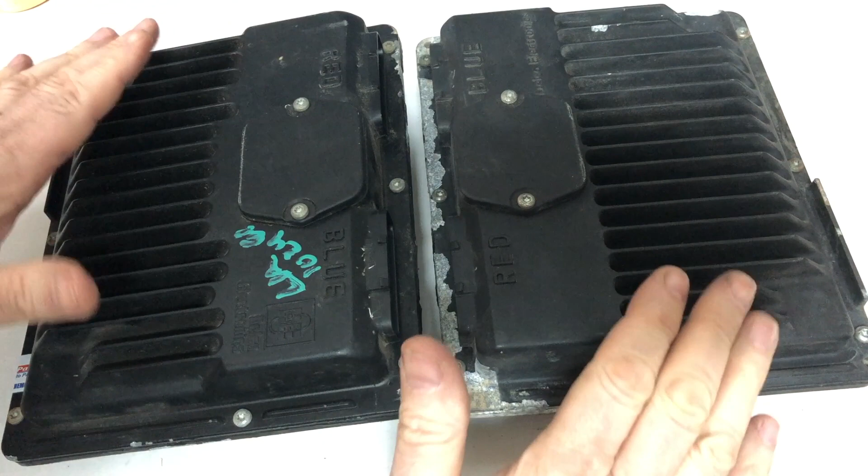Hey guys, in today's video we're going to be taking a tour on how to inspect, test out, and program the Vortec series of vehicle control modules, whether it be the 96 to 97 series or the 98 and up series. So if that's what you need to do, stay tuned. We're going to get right into it.

All right, let's talk about where you can find these vehicle control modules. So this is on a CK truck. The vehicle control module is going to be located right here near the driver's side fender, right adjacent to the fuse and relay box. If you're trying to find it on a G van, you're going to find it still on the driver's side, sitting down here, and there's your fuse and relay box here. Right here's your fender here.

You may have hoses and piping from the brake system in the way here obscuring it, but that's where it sits. In a G van, if you're looking at it in like an M or an L type van, like an Astro or a Safari, it's going to be sitting in a vertical position instead of horizontal, right behind the battery. So this is the battery here, and you'll find it sitting right there. The same vehicle control module that we're going to go over today is used on all these different vehicles.

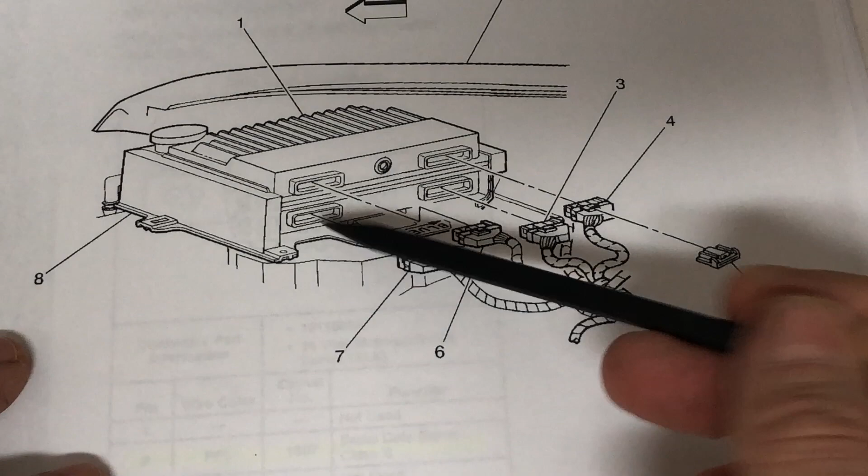If you're talking about an S or T type truck, like an S10, it's going to be sitting, here's the right-hand side fender facing the forward part of the vehicle. You should find it sitting right here. So this same kind of VCM is used on all these vehicles.

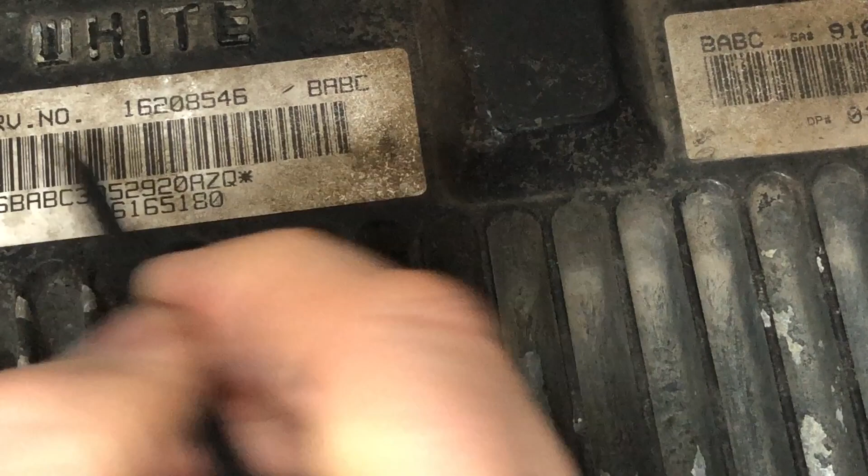And the two of them that we're going to be showing today, this is one from a 98 vehicle, and its service number is 162-50279, and it has an identification number of 162-58835. I'm also going to be showing a 96 one, very similar design, just a different number here. This one's service number is 162-08546, and it's got another identification number down here of 161-65180. So they look very similar.

If I back out here just a second, they look very similar in terms of very heavy construction. These first generation ones are pretty weighty, and then having the connections on this side, it's pretty common at this stage to have the paint peeling on these. So when you go pull one of these at the salvage yard, cosmetically, you can't really be concerned with that.

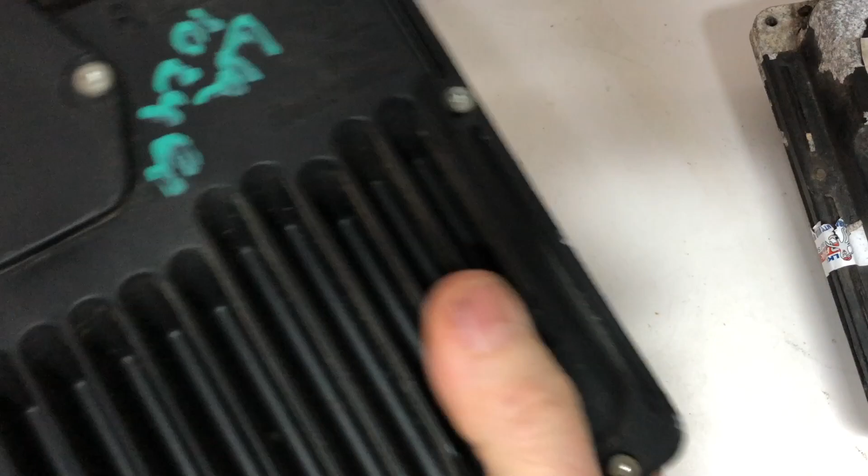These 96 and 97 ones, you've got a cavity that's embossed on the top here with black, and you've got another one embossed with white usually - might say gray, but white is what I've usually seen, and there's one here. Then on the 96 and 97s only, you've got this fifth connector right here. On the bottom, you've got another connector here and here. If we flip this guy over, we'll see that that one is characterized as a red and a blue. You've also got this cover held on with a couple of Torx bolts, and inside here is a calibration module for the knock sensor.

Now we look at the 98, it looks identical. If you don't take a close look at it, it looks identical, but I'm going to show you there's one key cosmetic difference. You still have the white, you still have the black here. On the bottom, you still have the blue and the red. You still have the knock sensor, knock module calibration module that's in here. And then the difference mostly is now, instead of having that fifth cavity, there's just this kind of round shape in the casting - there's nothing it plugs in here. So that's the key difference between the two of these.

Now, in order to get it off, I'm going to show you - there's usually a little spring kind of clip that holds it on this side, and then on this side, there's usually a couple of tabs that it latches into. I'll try to link up over here on the top, maybe a little view of what that looks like extracting it. The other thing you'll encounter are these little retaining clips, and these retaining clips you can pop off pretty easily with a screwdriver. You just want to kind of lift up here on the top part and just pull it off.

This is what the 98 and up ones look like. On the 96 and 97s, you'll probably see this kind of red one. It's a little shorter, but it's the same deal - it just doesn't have the little piece that you can grab with your finger at the other end here.

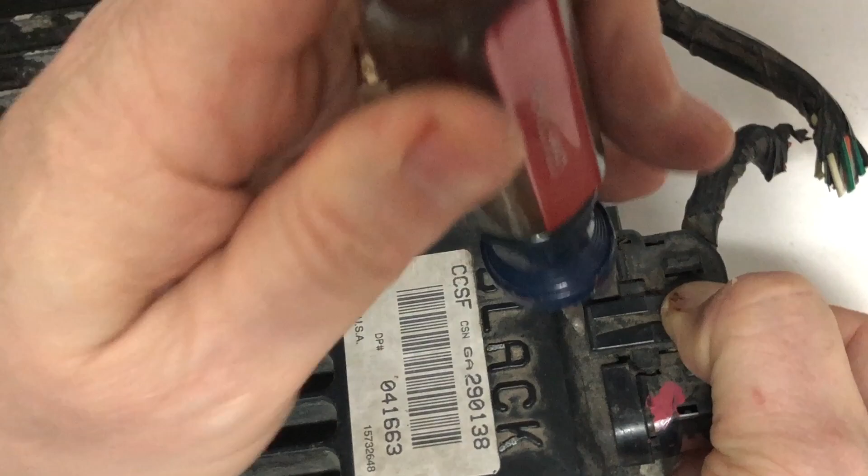What I found easiest to get these off, these clips, these retainers on the connectors really latch on tight. This is a real waterproof design, a very rugged module. So what I find is you hold this guy down, and then I like to take a very wide flat blade screwdriver, and you kind of just push it out like that.

So when they talk about the colors and what they mean, this one has a unique type of retainer. The other three are going to be more of this style. Again, you just kind of push it down, and you can take a flat bladed screwdriver, a wide one like this, and just gently help pull it out.

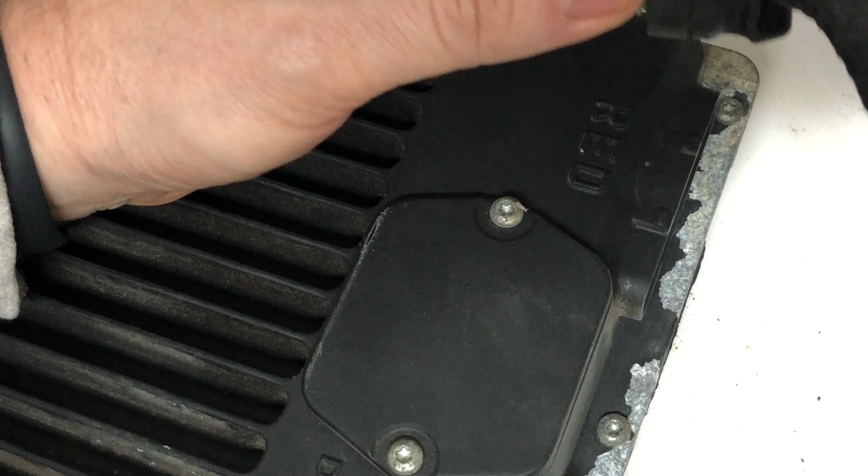When they talk about the colors, you can see how the plastic in this white one is kind of white, maybe even clear, natural, different colors you might use for this. Over here, the black one is kind of like a smoke, a dark gray. And similarly, if you look on the bottom, here's this red one, the connector for the red one will be red, so you can't mix them up. Similarly, the blue one will be blue, I'll show that one in a minute. You can't mix up where they go, even though these three here might all fit the same, they have these different colors.

The one we talked about on the 96 that's different, where it has this centerpiece, this C5 connector, this is not really anything—let me find what I did with it, I know I had one of these to show you guys. What this is, is just a loop back kind of connector, and here it is. It actually looks like this, and all it is, these two connections here are tied at the end.

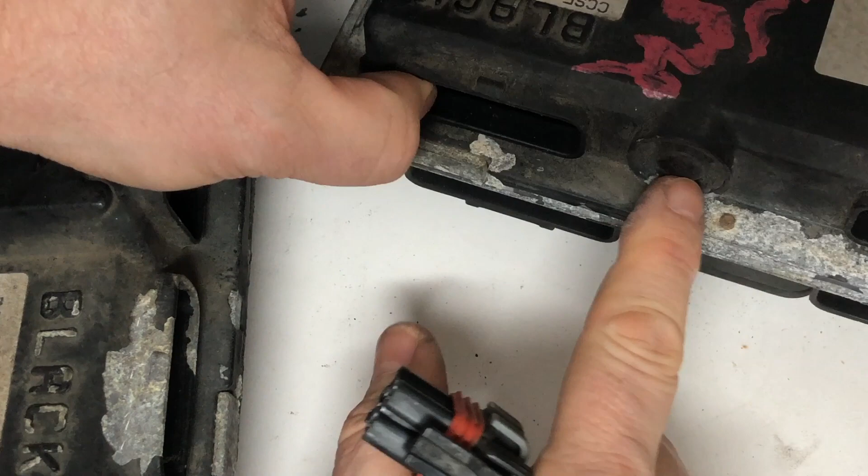Now, I actually cut this off at the salvage yard before I realized that, but if you peel back the harness about 8, 9, maybe 10 inches or so, you'll find that it's factory just looped together, these two connections. And this guy's just kind of like a standard one—he goes in here, he grabs at the top, and to get him off you can just lift up the top and wiggle him loose. That's all it is to that. Again, that's not used on the design of the VCM in 98—there's no connection for anything to plug in here.

All right, so that's where you find them. That's how you disconnect, that's how you get them unlatched, and that's how you disconnect the cables from the wiring harness, and that's the differences.

I'm going to show you now a harness that you can put together, that I've done to program these on the bench, which is right here. And here you can see an example of that blue connector I was talking about earlier. We only need the blue for the 96 and 97. What's common between all of them are the connections that we'll do on the black and the white side. And then we've got a DLC connector for our scan tool to fit in there.

And then we've got a switch so that we can simulate turning the ignition key into the on position for some of the different steps of tests we'll be doing. We've got all the grounds and powers that we're going to be using tied together, our ignitions tied together and hooked up to the switch here, and of course what we need for the communications line tied together and connected to the DLC itself. So let me show you now what that looks like in the wiring diagram.

I'm going to kind of move this stuff out of the way here. This paint that peels off these things just crumbles apart very, very easily, and it gets everywhere, let me tell you. All right, so what we're going to take a look at here is what we did on the DLC.

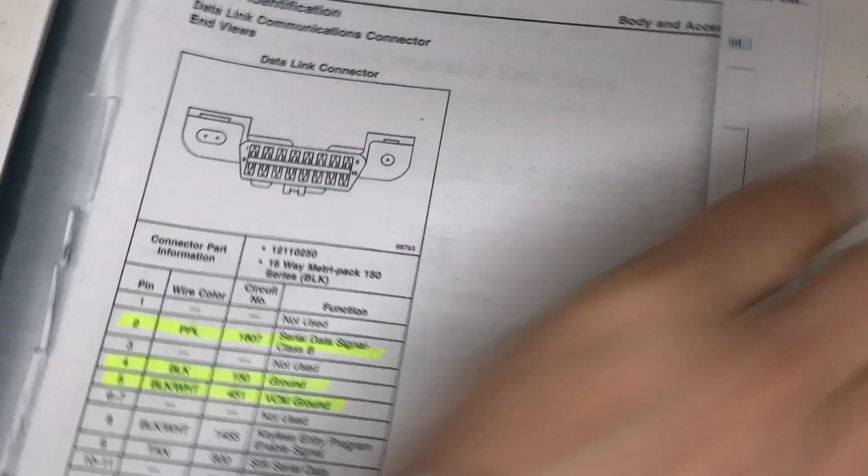See if we can blow this up just a little bit. There we go. So this is the diagnostic or data link connector, sometimes called a diagnostic link connector.

We're going to want pin 2 of that and the purple wire for our Class B serial data, also called Class 2. We're going to want both pin 4 and 5, which are the grounds, particularly the VCM ground, but also the ground we need for the Tech2, black and a black and white. And then we're going to want pin 16, which is an orange battery power line.

So with those connected, we'll have what we need for the diagnostic link connector. And then we take a look at the various connectors, the components. This is the blue one called Cavity 1.

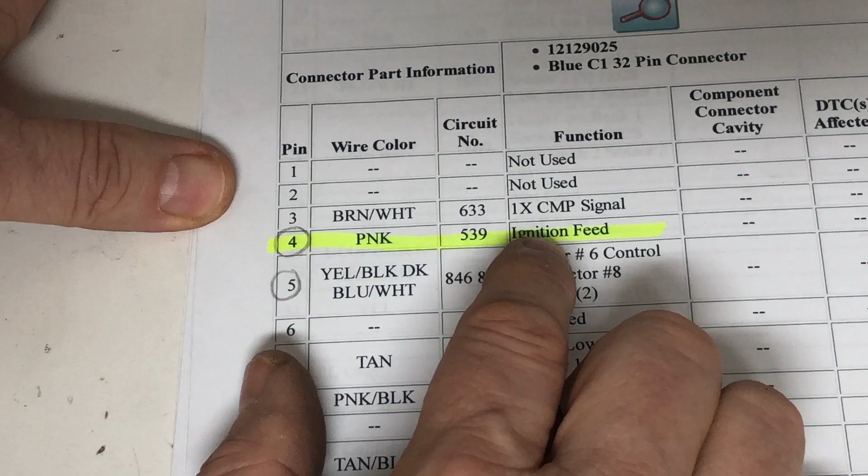What we want is only for 96 - wherever I've got a pencil circling something here, it's talking about what's different between 96, 97, and 98 and up, which is why these VCMs are not interchangeable. So pin 4 doesn't exist as an ignition feed in 98 and up, but it does in 96. We took this in because we need it for the 96 one. That's the only connection on the blue that we actually need.

So anything in yellow is something you need for this harness I was just showing. But just going through here and showing you.

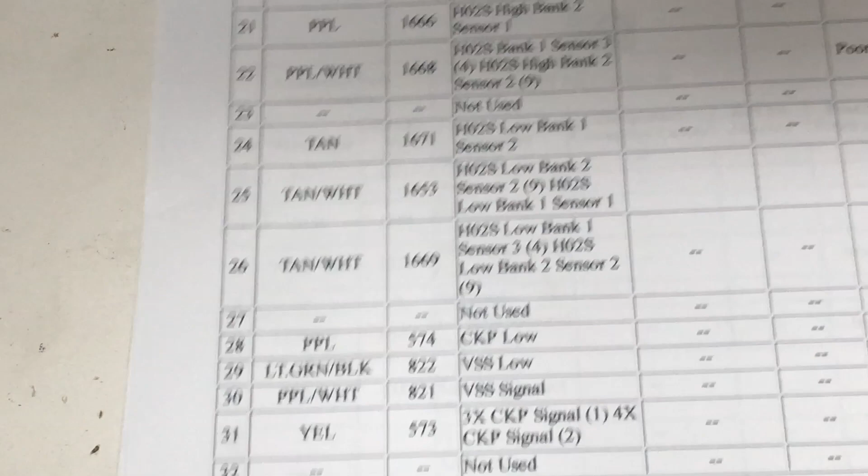So pin 5 and pin 9 and pin 12, these are all different things than how they're wired up for 98. Continuing to go through these connectors, this is still cavity 1, the blue one. Pin 18 is different between 96 and 98, and the rest are in common. So you see there's enough differences to make them incompatible.

But the only thing we would need for our bench harness for a 96 and 97 only is pin 4, so we have an ignition feed. The next one I'll show you here is cavity 2, which is the red connector.

Again, wherever it's circled, it's just highlighting things that are different. For example, pin 2 is not used on this 96. But if I was to look at a 98, I would find that it is used, and I'll show you that here. I think I have that handy just to show one example comparison.

We've got the actual service manual for 98. And if we take a look at that connector that we're interested in, C2. Just kind of compare these two.

So we were looking here that on the red connector C2, pin 2 is marked as not used in 96, and we marked it as a difference because we circled it. If we take a look at C2 for 98, we can see that it's actually the canister vent solenoid, so it's actually used in 98 and up, even though it wasn't used over here.

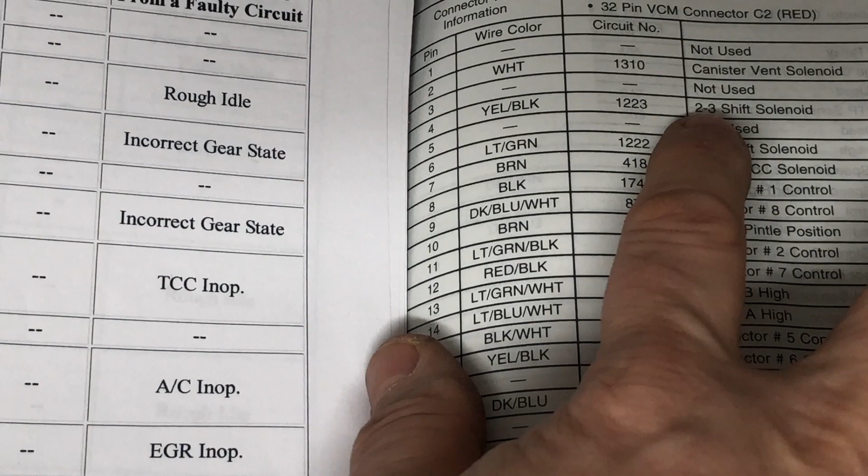Very similarly, we see pin 3 is used in 96 and 97 as an injector number 1 control line, but pin 3 in 98 and up is not used at all. The rest of these, like the second-to-third shift solenoid and the first-to-second shift solenoid, we can see are in common, so they're not circled.

Continuing on, I'm just showing you on this red connector - we don't need any of this for the bench harness, but just showing you all these differences. So pin 8's different, 9's different. We continue going through it.

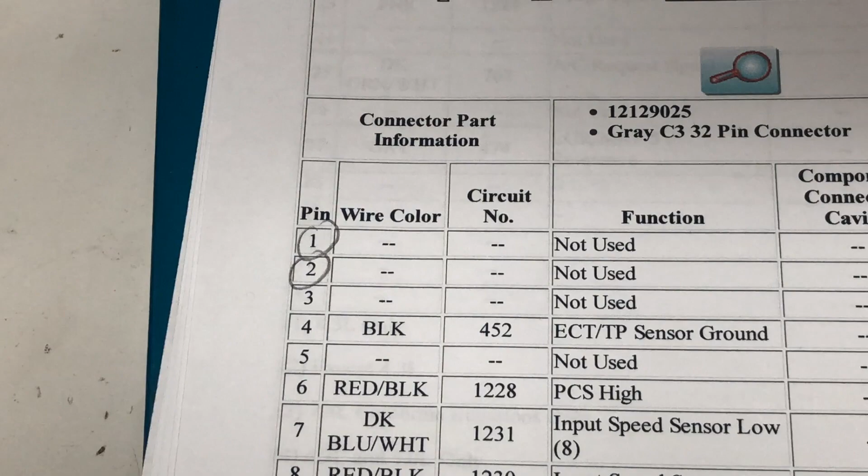We can see that pin 25 is different, and the service manual doesn't even show it, but there's supposed to be a pin 29 here. So there's just enough differences to make them incompatible. Another big difference is in 96, the ABS brake system - the VCM had a role with the ABS brake system, so another difference, and we'll see that when we get over to the programming step.

Here's connector C3. They're calling it gray, and that would be the one we talked about, this white - it might be referred to as gray in some cases.

We've got pin 1 and 2 are different for 96. Pin 13 and 14 are different for 96 and 97 compared to 98 and up. And then we take a look at the ones we're really interested in for the programming - pin 15 is different, but what we care about is the same. 17 and 18 are common to all of them.

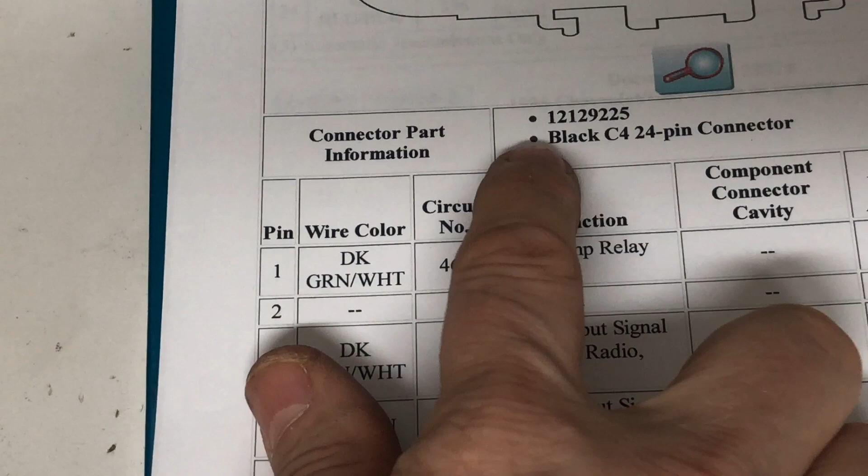So these are both the ground lines, and pin 21, battery feed, is common to all of them. Then again, pin 30 is different between 96, 97, and 98. And then again, with the ones we care about, looking at the black C4 one, cavity 4.

7's different between the two, and I'm just showing you the differences so you can note it as to why you can't interchange these VCMs. So you cannot take a 98 VCM and use it as is on a 96 vehicle, or vice versa.

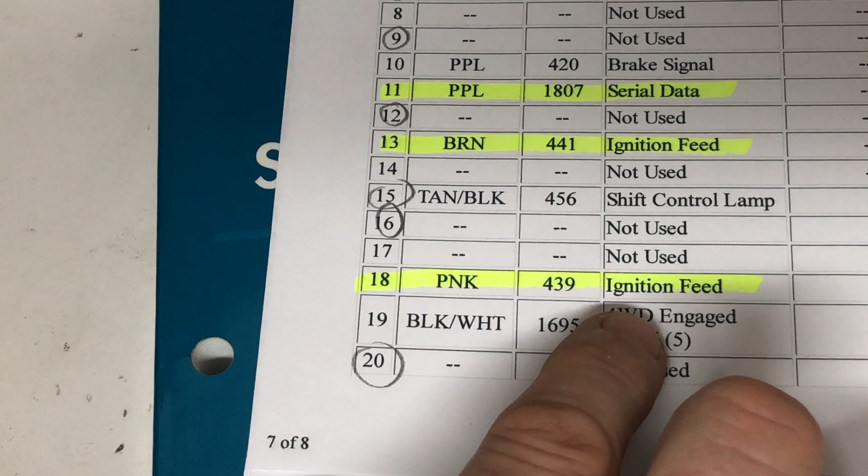11's common, and we want that purple wire for our serial data. 12's different, but 13's common, brown, ignition feed, we need that. A couple other ones that are different: 18's a pink ignition feed, we want that, common to all of them, 96 and up. Anything in yellow is common to 96 and up that we need if it's not circled. Again, if it's got a circle like we did at the beginning with that first ignition feed, it was different. And then, of course, 20 is different.

And then if we take a look at the last page, there's no differences, but we don't need any of these. So with that wiring, we can get something that allows us to power this up on the bench and allows us to hook up a scan tool and check this out.

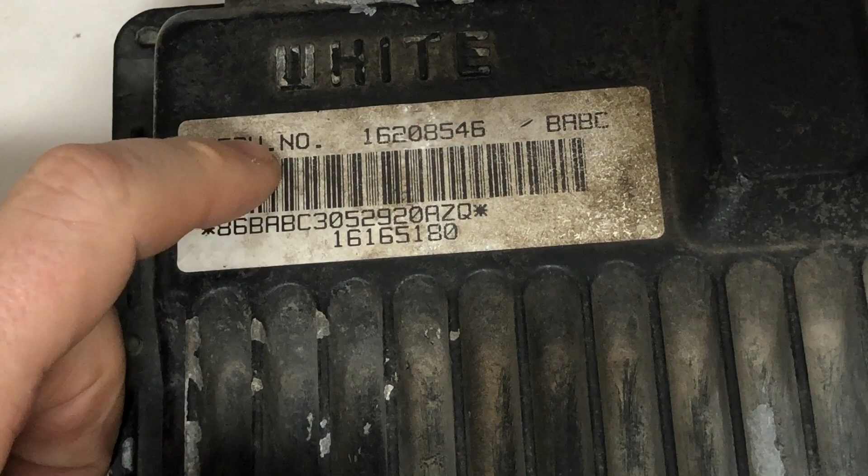So I'm first going to take a look at this one from 96, this guy here. And we're going to go reference that by the service number. So I'm going to take a look at this 16208-546 model. And we're going to hook this up and do a test on the bench.

Now, just like any other salvage yard module, powertrain control module, engine control module, in this case a vehicle control module, cosmetically, don't be concerned about peeling paint and that sort of thing. What you really are concerned about is checking out these pins and making sure that in all of these cavities, as you remove these connectors, that everything looks pristine and intact. You don't want to have any problems with corrosion. You don't want to have any problems with bent or missing pins. If you do, don't purchase that one.

Go look for a different vehicle to find something that's got a higher probability of checking out okay, like we're going to do now.

The other thing I would point out here before we get started actually hooking it up is when you take a look at some of the documentation in the service manual, one of the things that's common for all of these years, they talk about vehicle control module replacement and programming, things you're going to have to do after you change it. For example, you're going to have to do a Passlock programming procedure for the security. You're going to have to do a system variation relearn on the crankshaft position sensor.

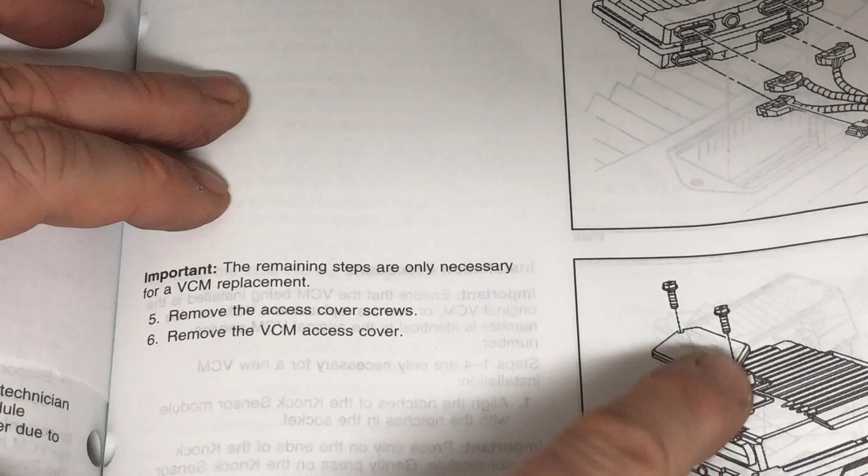Otherwise, you're going to get a code for that. But one of the things I'm calling out here in particular that's kind of unique, and it's a carryover because this is a first generation system coming over as the first flash programmable control module for the engine and transmission, is you've got to actually open up this cover and transfer this calibration PROM to your new vehicle control module. Now, you'd think something that's flash programmable, you wouldn't actually expect to have to do something like that.

But if we take a look at this guy, and this is common to all of them, whether it's 96 or not, you've got a couple of, let's see what size this is, this is a T20, you got a couple of T20 screws, bolts, whatever you want to call them, holding this guy. They're going to be super tight when you remove them off of here. You take these two off, and then you'll be able to get this cover off.

And this cover might not readily come off. Sometimes it does, sometimes it doesn't. You might have to give it a little rap with a plastic mallet or something to get it to let go after so many years.

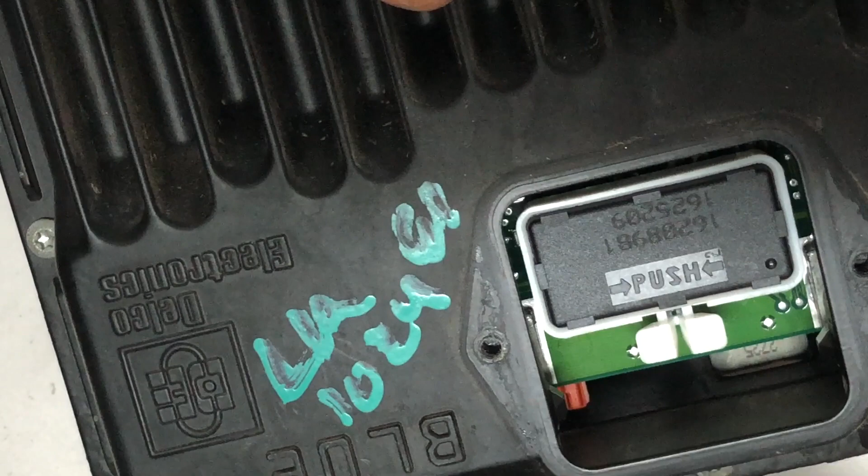But inside is this calibration module for the knock sensor. And to transfer it from your used one to your new one, just like it says on here, you push in these two clips and it lets go.

Now, imagine what's inside this. I haven't actually torn one of these apart, but I imagine what's inside here is some type of a ROM chip, like a PROM, like in the 95 and earlier era. And when you get the new one, there won't be anything in here, and you'll have to transfer this from the used one that you're replacing. You have to pop this guy back in and reattach this.

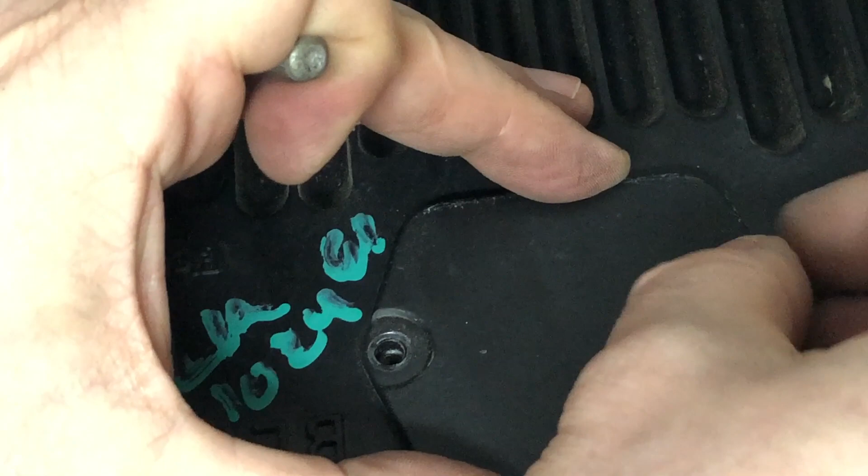And at that point, you'll be ready to proceed with the programming step. If you're doing a salvage yard PCM, you already have one of these calibration modules, and you don't have to do this step. But a new one, at least what the service manual claims—I haven't actually tried to purchase one of these new, so I'm going by what GM says in their manual. What they're alleging is when you buy one of these brand new, it doesn't have that, so this is the transfer procedure you'd have to do before proceeding with the replacement and the programming.

Anyway, thought that would be a good tip to show. Just get these snugged back down. They don't give a torque value for them—just keep it nice and snug so the gasket keeps a watertight seal.

What's actually interesting is when you look at these, they tend to look really nice on the bottom. I mean, they might be dirty, but you don't typically see the peeling paint problem on the bottom like you do on the top. It's just interesting how, when it's exposed on the bottom area, you'd probably see the same thing, but you don't ever get any water trapped in this. The kind of retainer this sits in, the bracket, just doesn't let water accumulate, so this stays rather pristine.

All right, so let's get set up to hook this up. One of the things I'm going to point out, I got another tip for you here. I think I can find this—yeah, here, I printed this out.

So we talked about this fifth connector that was unique on these 96s. I wanted to show you, you can't find this in the service manual from GM. But if you do a third-party service subscription and print out schematics, like a professional shop would use to find an electrical problem, they actually call this guy out. They talk about cavity 5, and they describe this as a service circuit power connector, just showing that loop back I was mentioning. I don't know if this is some vestigial thing that was on there from before OBD2 came out—maybe GM was thinking you'd have to plug something in to program these. I don't know, it's pure speculation, but it completely serves no purpose. It's just a loopback, and it was phased out when they got to the 98-and-up designs.

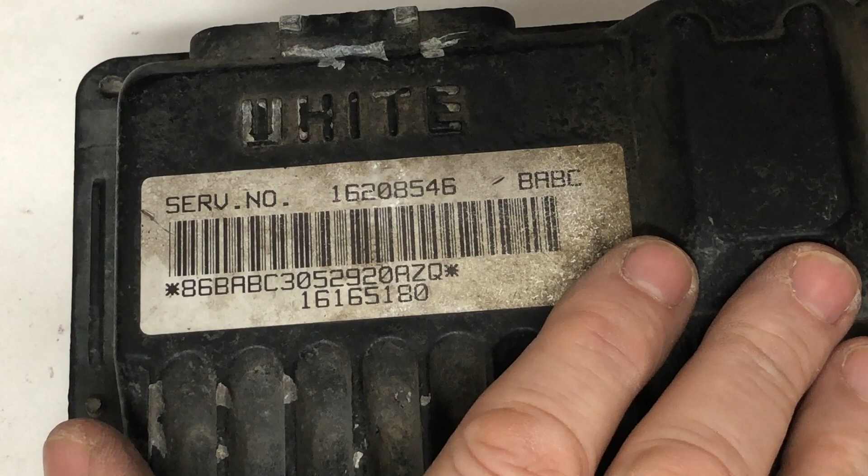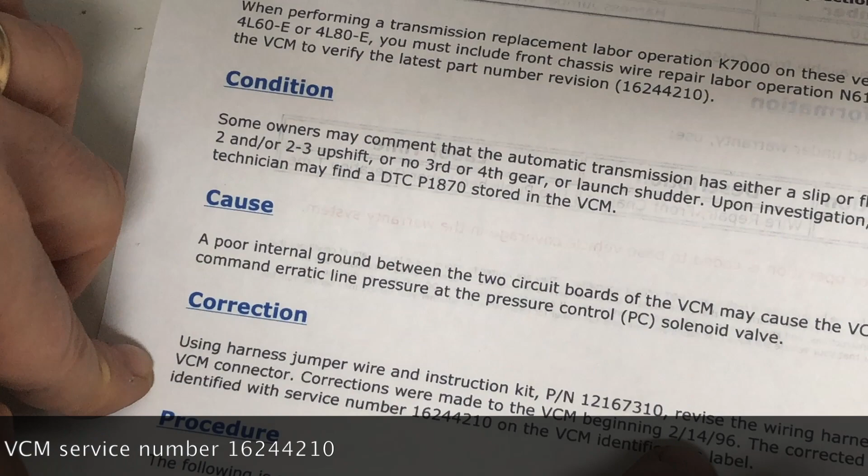Okay, one other thing to call out: unique to this particular vehicle control module, this particular part number was only used for a very short time in '96 because it's got a wiring defect. If you had this, there was a technical service bulletin GM put out that said you need to install a wiring patch kit, part number 121-67310, which revises the wiring harness at the VCM connector. This was corrected in manufacturing on February 14th of '96, so vehicles made prior to this date with the part number I showed on the VCM need this applied.

The revised part number for '96 and '97 was service number 162-44210. I'll put a link in the description—you can find these wiring kits on eBay. It's just a jumper wire.

The procedure you ended up doing is you'd go into the blue connector and move the wire located at connector J3 in the white—they also call it white/gray/clear, there's a lot of names they use for that one. You'd remove pin 18, and move it over—I just noticed these guys are using J here instead of C, so you have to be careful. GM isn't even consistent between the service manual and these bulletins on what cavities they're talking about, so follow along with the colors here.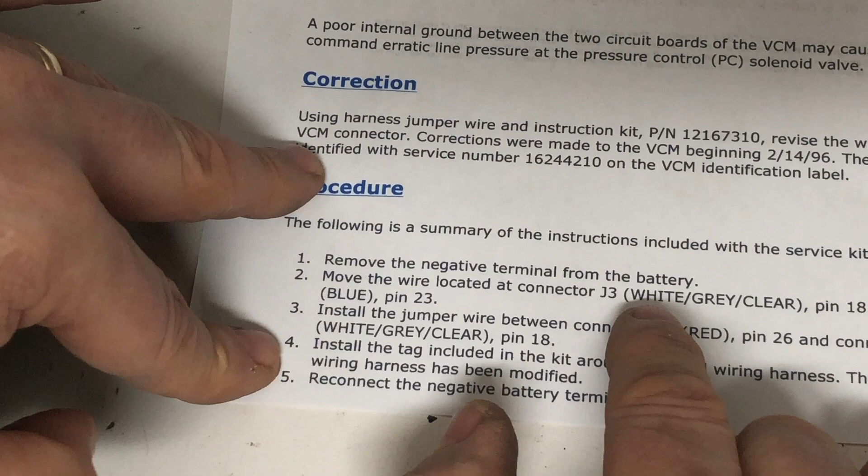You're basically going to take pin 18's wire from this white connection and move it to the blue pin 23—just take that apart and move it. Then you're going to install the jumper wire included with this kit, part number 1216-7310, between the red connection's pin 26 and the white connection's pin 18 that you just took out.

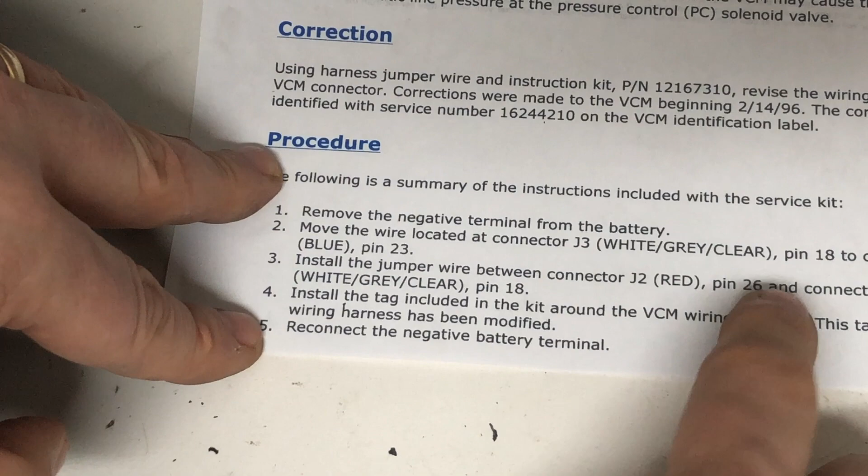So it's going to basically have a jumper there. There's supposed to be a little tag that comes with that kit that you wrap onto the wiring harness to let service folks know that you've made these two changes. But that's all it is, right? You install a jumper wire from pin 26 to the now empty pin 18, from red to the white, and then you would have depopulated pin 18 on that connector and repopulated it into pin 23 of the blue connector.

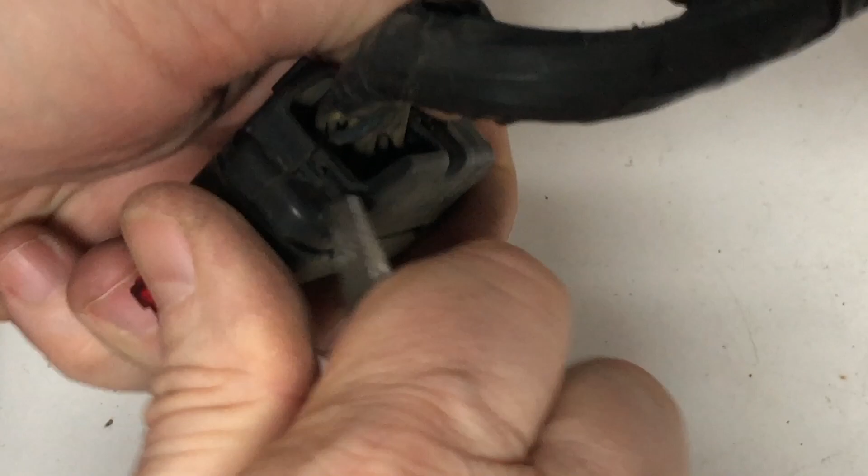Now when you look at these connectors, if you're going to do something like that, you're going to need a screwdriver handy. You look at these connectors, and on the back of them you can see these little tabs—there's one here, one here, and one here. I don't know if I can do it with this larger screwdriver, but I'll give it a shot. Yep, okay, we got lucky with that. You just go and unsnap these all the way around.

And that lets you open this up and gives you access to the harness inside the connector. What they're actually saying is to pull the wiring out, including its pin, and transfer it over to one of the others.

Now there's a tool you're supposed to have to help push these through, and I'm not going to get into that in this video because this is about programming and changing the VIN on these VCMs. But I'm just highlighting that if you have this particular early '96, this one only, you're supposed to have had this modification done in the field by the GM dealer, more likely while the vehicle was still under warranty, but certainly at some point, to address the problems that these '96s had that were made before February 14th affecting the transmission. So basically the VCM was giving the wrong programming information based on having the wrong sensor inputs because of these wiring issues. It wasn't correctly controlling the automatic transmission.

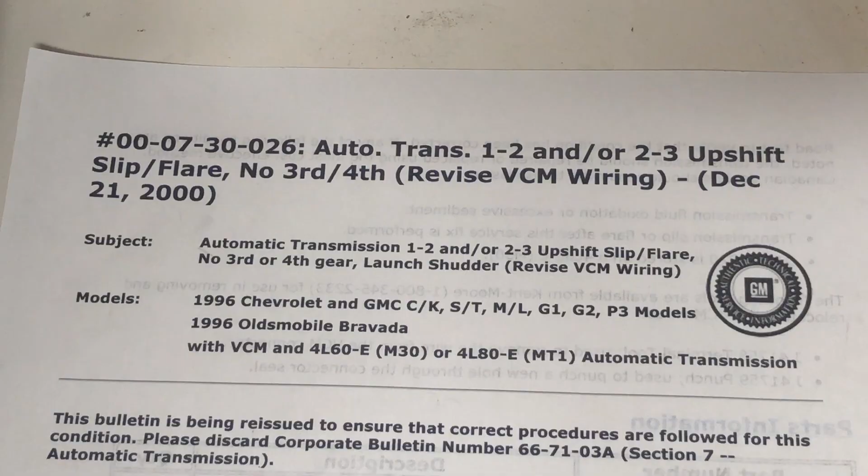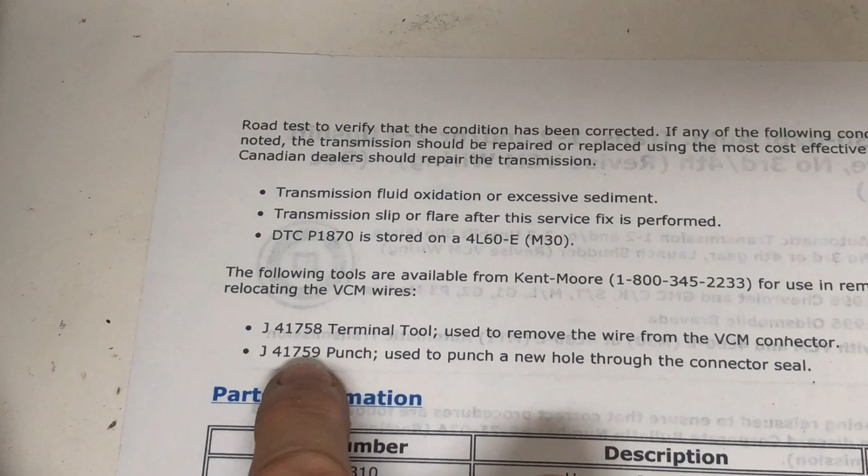This affected both the 4L60E and the 4L80E. Anyway, so just a side pro tip—and again, the part number I'll link in the description for this harness jumper wire kit—and you could also just make this yourself, right? I mean, all it is, is a jumper wire and moving a wire from one cavity connector to another. And they talk about a couple of dealer tools they use for pushing out these pins, but you can use other tools to accomplish that. So just a side comment.

Let's just keep going now. So we're going to get set up to program our '96. So let me go do that.

All right, we've got our VCM hooked up to our wiring harness. Since this is the '96 one, we've got our blue connector plugged into the connector so that we can get an ignition feed out of that—this particular '96, '97 type VCM has uniquely. And then we've got our white and black wiring harness connectors, which are common to all of them. And of course, we've got our switch that we're going to use to supply the ignition feed when needed. We've got our bench power supply hooked up to our battery voltage, and our ground on the bench power supply hooked up for that. We've got all those grounds tied together. We've got our data link connector here that we're going to plug into our Tech2, and we've got our Tech2 connected up to this.

And if we step over and take a look, come over here, we've already got our bench power supply powered up, and at this point we're going to power on the Tech2. And I'm going to go over here and flip this ignition switch to the on position, so that when we get to the point where we need it, we have it.

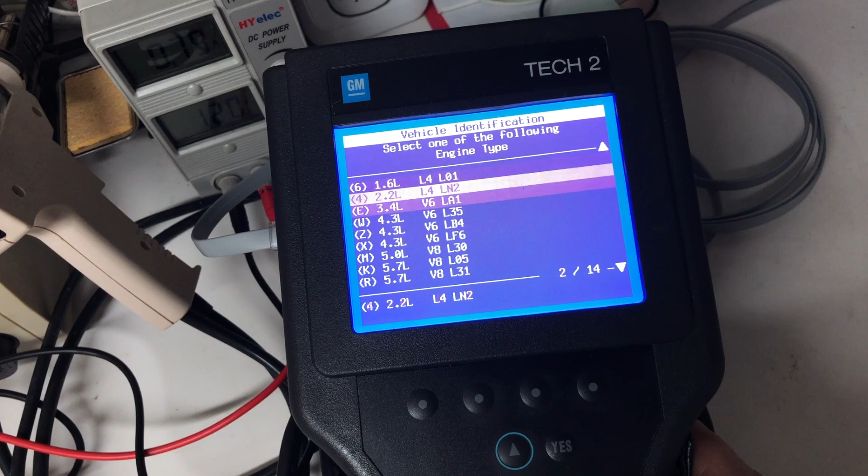So now I'm just going to go in and build the vehicle. So this is a '96. If I can tilt this up so there's less glare—it's a '96, it's a light-duty truck. We're looking at the powertrain. It's a VIN code R. It's a C, two-wheel drive vehicle with a 4-speed automatic, half-ton. And then we come down here to the ID information.

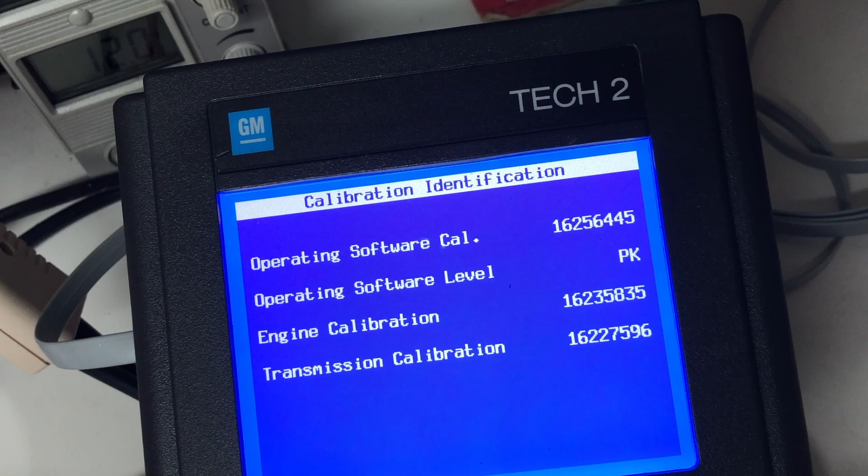And at that point, we can look at the calibration data that's in the vehicle control module. So we can see here that we currently have an operating system calibration, 6445—PK is the code for the OS level. We've got a 5835 engine calibration and a 7596 transmission calibration. And if we pop out and look at the VIN, we can see that we have a VIN: 1GCEC14W6.

TZ108477. That tells us this particular VCM came out of a vehicle that had a 4.3 liter V6 in it, that code W. So we're going to change this VIN to the one we want with code R. Now the fact I picked code R before on the read doesn't matter, right? That's this particular set of things we're checking are common between the V6 and the V8.

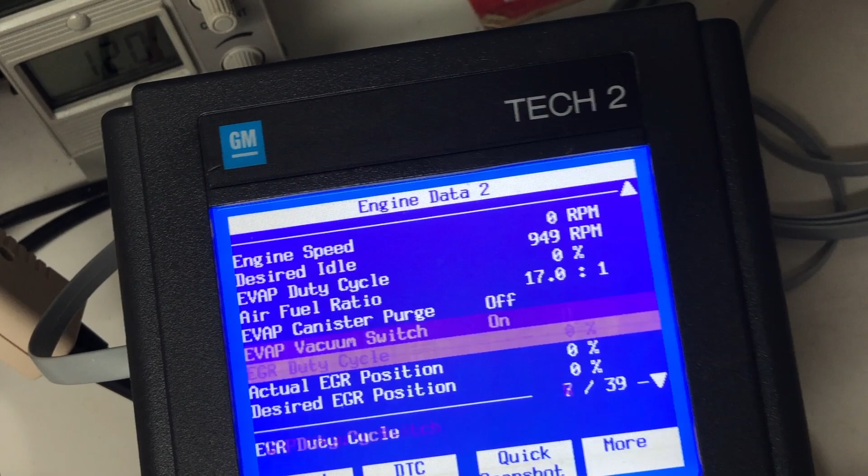So we're just doing basic tests to let us feel that this VCM works. If we come into data display, and engine data display, and come down here, I think I can find what I want on engine data 2. We're going to take a look and see that we can see the ignition voltage information showing up okay. It's one of the few things I think we can check here on this 96 era VCM. There we go.

So it won't actually show us the voltage. We'll find out that on the 98 and up it will. But it does have this indication to tell us that ignition 1 is on. It's not low and it's not high, so it says no to those two. And if I come over here and turn the switch off, we'll see it changes. Ignition on, nope. Low, yes. Turn it back on. Ignition on, yes. Low, no. So we're getting a response.

I mean, it's at least alive. We're able to read data that's stored in Flash on the calibrations, and we're able to interactively in real time get the VCM to respond. So we can be satisfied that it's not dead and it's reasonably functional. So at this point, we're going to go ahead and proceed with the programming.

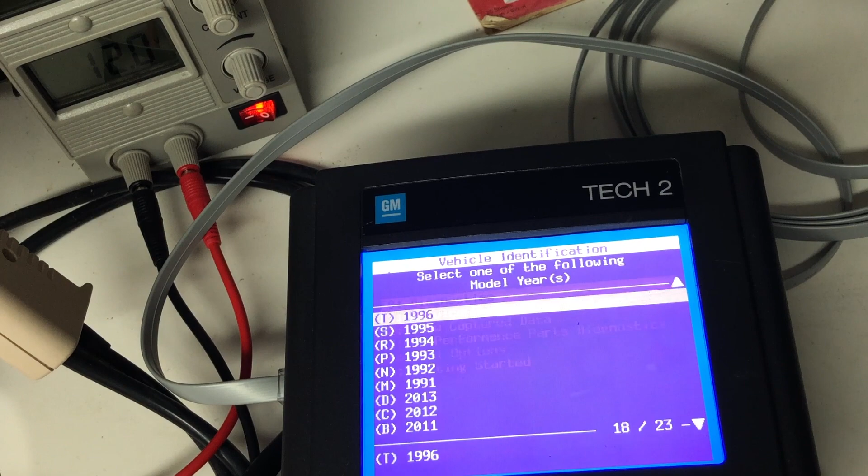Now I'm just going to back up to the beginning screen here to get ready to do that. You want to be on the start screen when you're going to do anything with SPS. I've already got my serial data connection plugged in on the side of the Tech2. And we're just going to go over to the Windows PC that we're using to run TIS2000.

We'll go ahead and take a look at programming this guy. So I'm just going to switch over to this PC, move this up so you can see that screen. All right, once you get this up in view in this menu here, you're going to go into the Service Programming System. That's the module within the TIS2000 application that we use to program something like a VCM. And I'm going to set this up as a pass-through because we're just going to be using the Tech2 as a pass-through to the vehicle control module.

We're going to say replace and program ECU. Again, a lot of jargon gets thrown around here - engine control unit, older term, but still in the tool here. Whether you're doing a PCM, a VCM, an ECU, it's all the same thing here, right? Then we're going to be selecting the off-board programming adapter because what we've done with this benchtop harness simulates that setup. Then we're going to press the next key here.

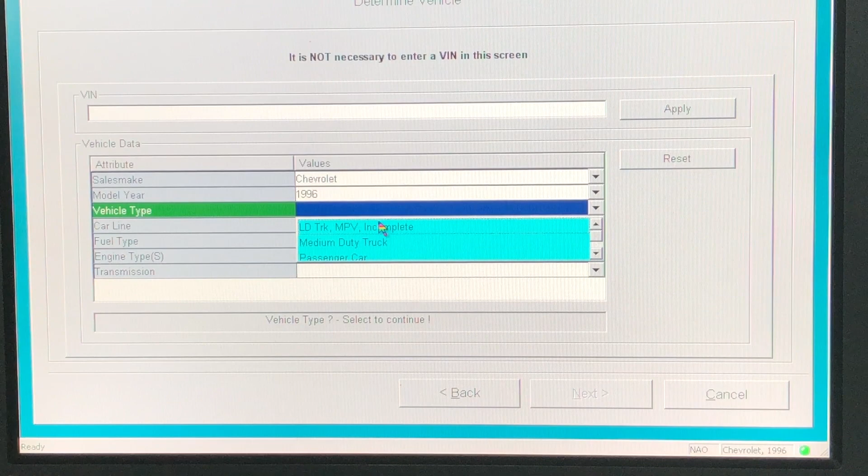We're going to build the vehicle, and I just want to lower this a little bit so you guys can see the status information on the lower right as it builds up the information. So when you go pick these, I try to stay at the salvage yard - I try to stay the exact same year. It's not so important that it be the exact same brand, right? So if I can find the exact same year and the exact same part number on the module, and it's in a GMC instead of a Chevrolet, that's okay.

But I do try to keep it the same wherever I can, where it's got the same type of truck. So if I take it out of a Suburban or a GMC, I take it out of a GMC Suburban, I try to have it be intended to go in a Chevrolet Suburban, for example. If you take it out of a Chevrolet Tahoe and you want to get it into a Cadillac Escalade, you just try to keep it very similar because it's more than likely going to be a smoother reprogramming for you, in my opinion.

All right, so they just have Silverado here for pickups. They don't show Cheyenne, they don't show Sierra. They point out old body style because, you know, these particular kind of model trucks might have run in parallel with the newer style in 99 and 2000 and 2001 and such.

So we're going to set this up like this. Notice it's not asking us for the fuel type. It doesn't really care about the engine. This is all it needs to know.

And then we're going to go to the next screen. It's going to tell us to make sure we've got everything hooked up properly with the off-board programming adapter. We've got our bench set up that simulates all this. We've got our Tech2 and its serial connection hooked up, and we've got it hooked up to the PC using a USB to serial adapter.

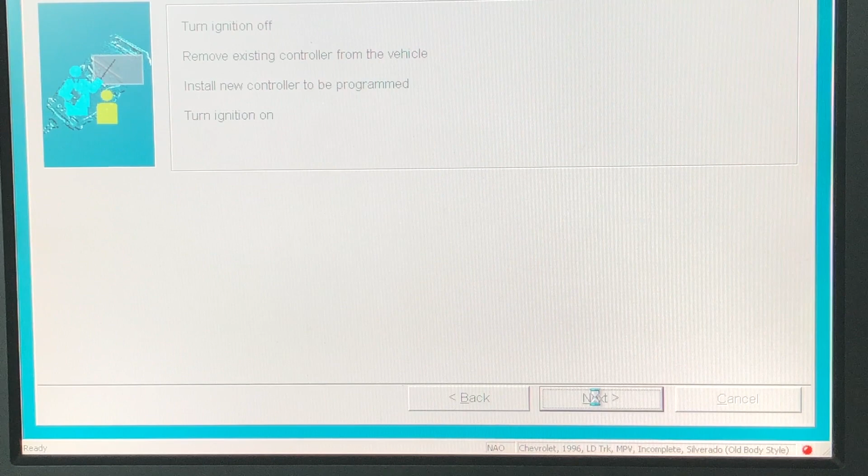If we were in the vehicle, we would do an ignition off, swap the controller ignition on event, but we're not. We just want to make sure our ignition simulation switch is on our benchtop setup, and it is. Then you notice it's red at the bottom. It's trying to build up the vehicle. It's going to reach over and try to talk to the VCM using the Tech2, and you're going to get this error.

M676, the ECU could be a service ECU. I only see this on these '96s that I've tried recently, and I couldn't find anything in the GM documentation, but I found this bulletin from Standard Motor Products from fall of 2003. It's a Tech Tips bulletin for shops using their rebuilt General Motors modules, and when you're trying to do the relearn information, it turns out one of the pages has exactly this error message. So it was a good find.

And I take a look at this, and I go up here, and I see right down here at the bottom is this exact error. So M676, the ECU could be a service ECU, and it says this is just a message. It indicates the PCM/VCM does not contain a VIN and calibration. We know that's not true, so for some reason it's not able to read it. It's usually seen on Delco PCM VCMs. Continue as usual - basically they say to ignore it.

Well, I've never ignored these kind of errors, but since these guys do this for a living, and at least at the time when these were still commonly done, we're just going to tell it, all right, we're going to ignore it. And what we're going to do is enter the VIN that we want to use here manually.

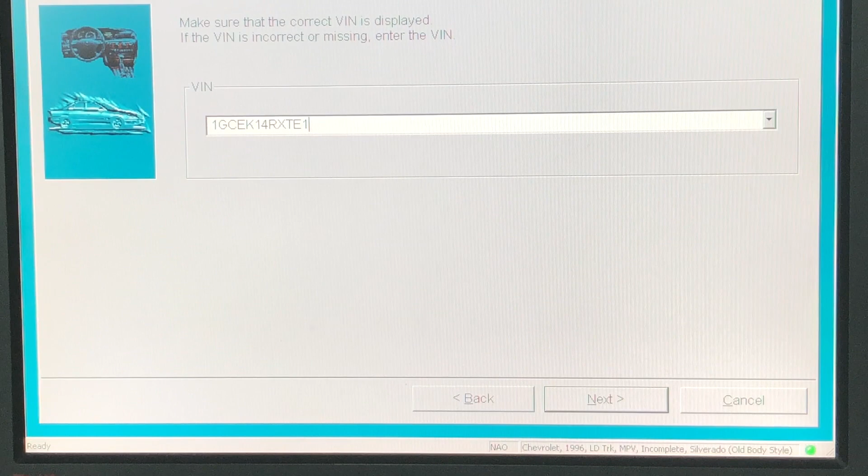So I'm going to pull up the target vehicle's VIN, and we're going to plug that in here: 1 GCE K14R XTE 107689. Now again, this is going into a vehicle that had one of these earlier generation VCMs that had the wiring problem.

This particular vehicle was made on October 20th, 1995. The donor vehicle, I think, was made in '95 as well, in October - I want to say October 18th, but I'm not 100% sure on that. But they definitely were made in close proximity to each other, and they use the same flawed vehicle control module. So we're going to keep with that.

So now when we enter the VIN manually, TIS is going to still proceed, even though it wasn't able to read it itself - it's going to take our manual override. It's going to come up and say, all right, what do you want to do - vehicle control module, powertrain control module? Yes, this is the one controller that we're able to do. We're going to do a normal program.

This reconfigure has to do with changing information in the PCM, or the VCM in this case. Tire information is what you probably find on here. Let's take a look at that first. So it's still able to reach out and communicate with the VCM, even though we had that error.

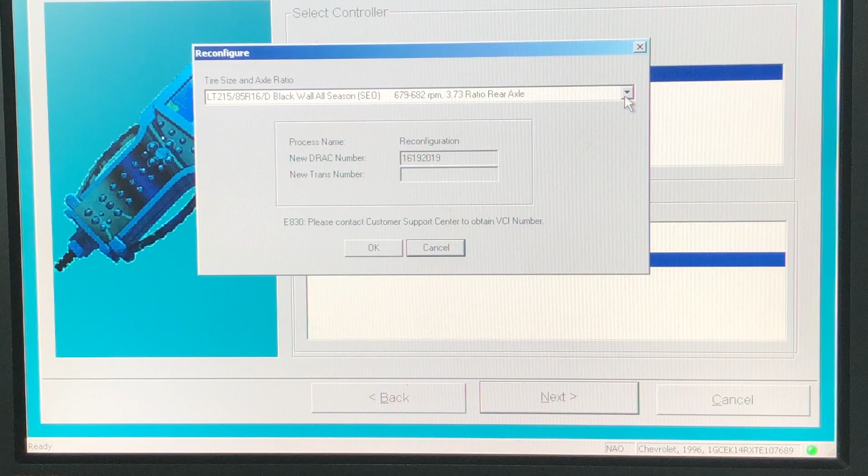So just like the bulletin said, it looks like something you can ignore for these particular years. And then what you get here is the ability - the only thing you can do here - is to come in and select a tire and rear gear ratio selection. So of all the tires that were available brand new for the vehicle associated with this particular VIN number, you can pick which ones you have and change it.

So there's a set of LT215s, 225s, and 245s - they're all 16s, although the first one's an 85R. And then if you come down here, you can see there's some P-Series tires in both 16 and 15 sizes that you can pick from, and there's a whole bunch of different types of tires. Looks like the axle ratios, though, are all fixed at 373.

But that's how you would come in on one of these programmable VCMs and change the tires. This is what the dealer would have went into - they would have reconfigured it. So we're going to go back out, though, because we're in here to change the VIN and the calibration. So we're going to proceed to the next step.

And you can see it's got Chevrolet down here because it knows on this target VIN that's what it's going into, because TIS2000 has a database of all the VINs.

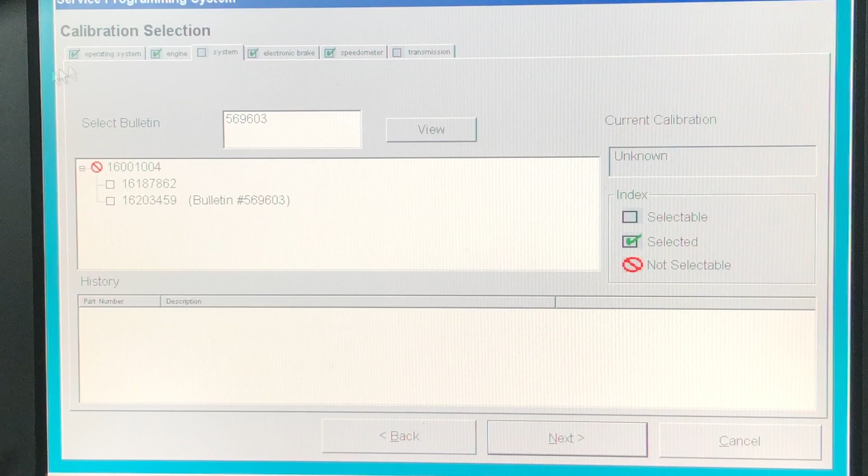I'm going to come up on this one a little bit, because what's more important is for you to see these tabs and selections at this juncture. Along the top we've got a set of tabs: operating system, engine, system, electronic brake control, speedometer, and transmission. In 96 and 97 you should have these six tabs with all these functionalities.

Since it wasn't able to read it, it claims it doesn't know what the current calibration is. We were able to see these calibrations when we read them on the Tech2, but for whatever reason, on this kind of setup on the bench, it's not able to do that.

We can see we have a couple of choices here. There's the 7575, and then there's this 7608. This 7608 is tied to a particular service bulletin that says it's to correct a chuggle or surge on vehicles that have a complaint like this only.

So you're not supposed to apply it unless the particular vehicle has the complaint, so it's not generally used—we'll take the 7575. We've got a speedometer calibration, no choices. Brake calibration, no choices. So you just take the one that's offered. Here on the system, we're offered choices.

The 7862 looks like just an initial calibration for production. And then we have one associated with the bulletin for vehicles equipped with the telecommunications option, where there could be some interference. I suspect if you read this, you'll see it's something like static or interference with the communications equipment and the engine's frequency.

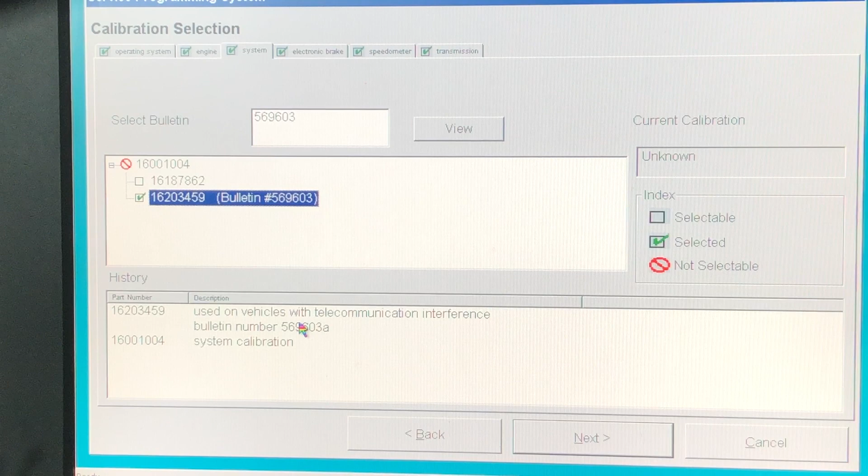And so we don't have that situation. I doubt any of those pieces of equipment are still on the road—probably an early type of cellular system, I'm guessing. Just a guess though. If you know, leave a comment below—I'm interested in knowing what type of option that was.

And then under engine, we're not able to take any of these because they want to force people into this particular 5879. They wanted the dealers to get everybody on this because it corrected a false trouble code and improved drivability. So they want everybody on that—you cannot take one of the older ones in this case. GM would do that to make sure they got what they wanted in the field.

Similarly, they're forcing you to take this. So we can go on to the next screen and we can see it wasn't able to read anything, but we can see what we're going to apply. We can take this in here, and then it's going to start the programming event.

It's going to go through the Tech2 as a pass-through. So during this whole thing, the Tech2 will just be showing this graphic to let you know it's not hung and that it's actually doing something—it just repeats this flashing asterisk, and then these dots and squares that fly by.

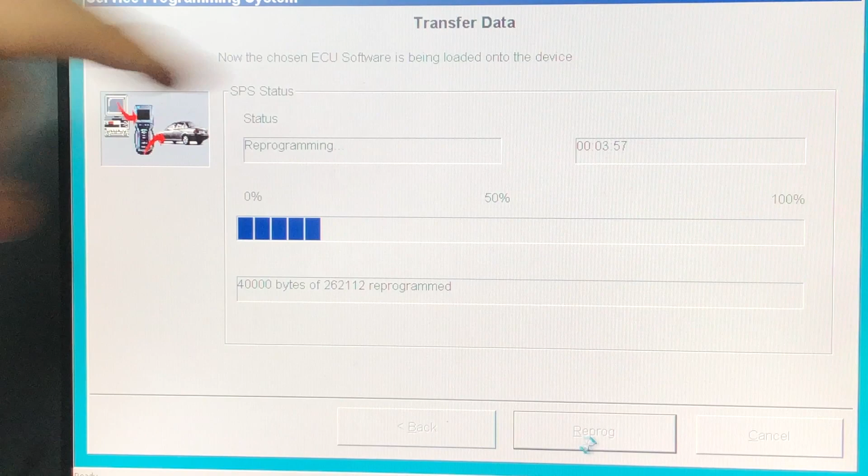Now it's going to go through for a bit and calculate what it needs to do before you'll actually see something update on TIS2000. There it goes—and we're going to be moving 262,112 bytes, or 262K. It's giving us an estimated time of 3.5 minutes, but I don't think that's going to be the case.

Things are moving along pretty quick, so it's dropping that time pretty rapidly. It's already dropped down to 2 minutes, and we're coming up on the halfway point pretty quick. I'm sure it's going to update that number again down to 1.5 minutes, so it's just chugging along.

And again, all during this time, you can just always reference the Tech2 and see that things are happening, data's moving. Obviously you don't have any indications on the module itself, but as long as nothing's getting hung and you don't get any errors, everything's going correctly.

The kind of errors you usually get on something like this on the bench is just communications errors with the PC. If you've got some problem with the USB to serial or the direct serial cable, that's usually all you run into.

On the vehicle, the kind of errors you might run into, it's very important that you have a good battery system support device plugged in. I'm trying to think of the right word, but it's escaping me. It's not a battery charger, but when you're on the vehicle, you need one of these battery assist devices. I'll link something at the bottom of the video about what I'm talking about. They just make sure the voltage doesn't drop too low, because these things draw a lot of current when they're being programmed.

And if you've got a weak battery, there's a possibility you'll end up getting stuck and brick the thing. All right, we get to the end here now, and it's all blank on what to do. It should have told us, like we saw in the service manual, about doing a crankshaft position variation relearn and possibly also a pass lock theft system relearn. It's blank because it wasn't able to read itself, so it doesn't know what to say here. That's just a software glitch in TIS2000. So we can close this out and we're back to the main screen.

So let's take a look at the Tech2 and kind of validate what we did and confirm it went through okay. So we're going to come back over here to the Tech2, and let's go back in here and we're going to rebuild the vehicle.

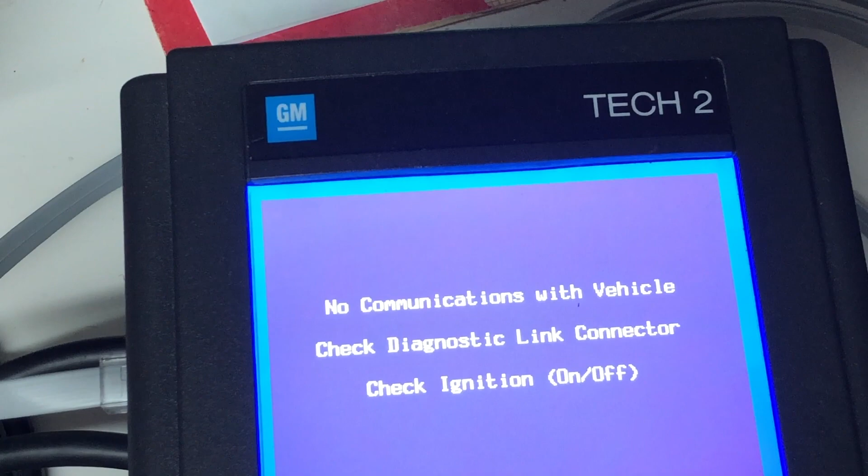Now, we should not have gotten that because I did turn our ignition switch on, but what I'm going to do is cycle it off and then back on. And there it goes. So, my bad, guys.

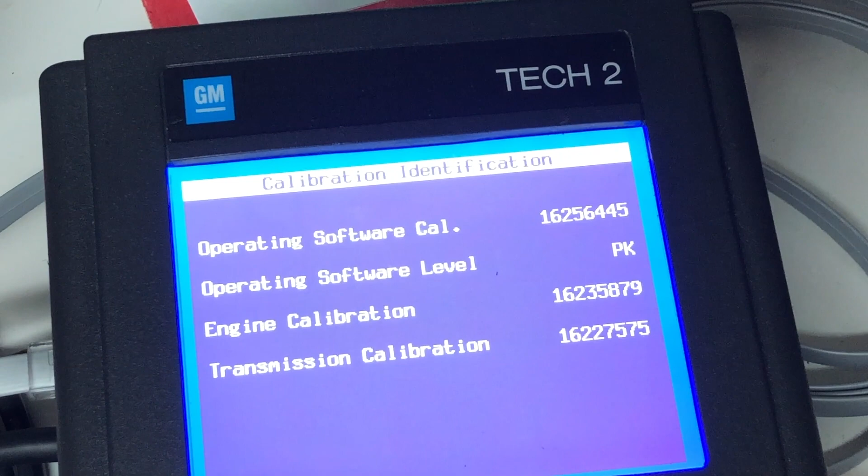Whenever you do one of these programming events, you've got to turn the ignition off for a little bit of time. You should leave it off for like 30 seconds, but I just cycled it so that the Tech2 was able to communicate. The VCM sometimes is not going to communicate with the Tech2 after you flash it if you don't turn the key off and back on and go through a cycle like that.

All right, so we turned that off and on. We didn't do anything on the Tech2, and it immediately was able to communicate. And we can see the calibrations that we're currently at: 6445, 5879, and 7575.

And if we back out and take a look at the VIN, we can see now we've got the VIN that we plugged in there, the 1GCEK14RX, now TE107689. So we were able to update the VIN and update the calibrations even with that error. So I have to say that the guys at Standard Motor Products, back from a decade or so ago, know what they're talking about - you just ignore that error.

It doesn't mean anything. So let me get set back up now, and let's take a look at the 98. All right, we've got our 98 connected. You notice we don't need this blue connector because there is no ignition feed on that cavity for the 98. And we use the same exact white and black connectors with the same wiring we used for the 96 and 97 - that's all common for the whole family.

We've got our battery voltage here, our ground to our benchtop power supply, and we still have our same switch for doing the ignition. So we're going to come over here now - same thing we did last time on the 96, and we're going to take a look at the Tech2 view.

It's a little bit different on the 98. Go ahead and turn our power supply on, turn our Tech2 on. And I'm going to go ahead and turn the ignition switch into the on position as well, so we don't run into that problem while we're going through this.

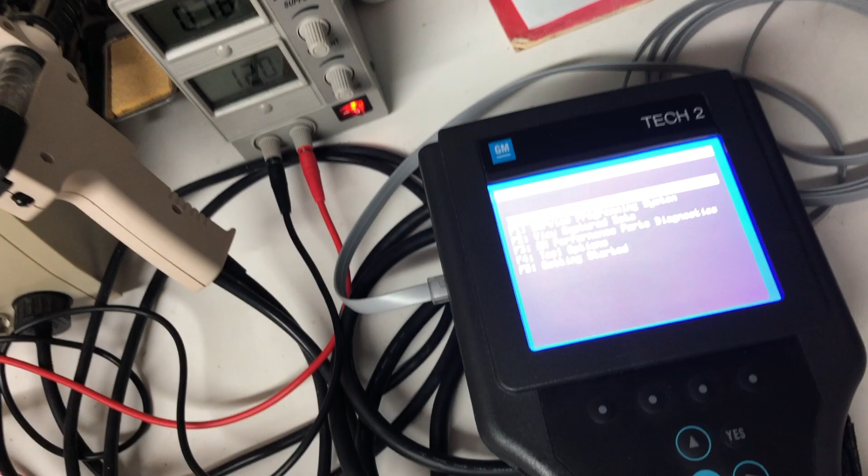So if I can get a view where this isn't so glary. I notice this is really glary. There we go. All right, sorry about that, I knocked the camera there.

All right, let's go ahead and build the vehicle. In this case, it's a 98, and this came out of a Chevrolet Suburban, and we're going to put it into a GMC Suburban. It's a VIN R. The one it came out of is a K, and we're going to put it into a C. Automatic, half-ton, no air pump.

Let's take a look at the ID information. Here's our calibration information. You can see that the layout of how the data is shown is a little bit different than it was in 96. So we have our software level in this year up at the top now. And then we have our software OS calibration, engine calibration, and transmission calibration.

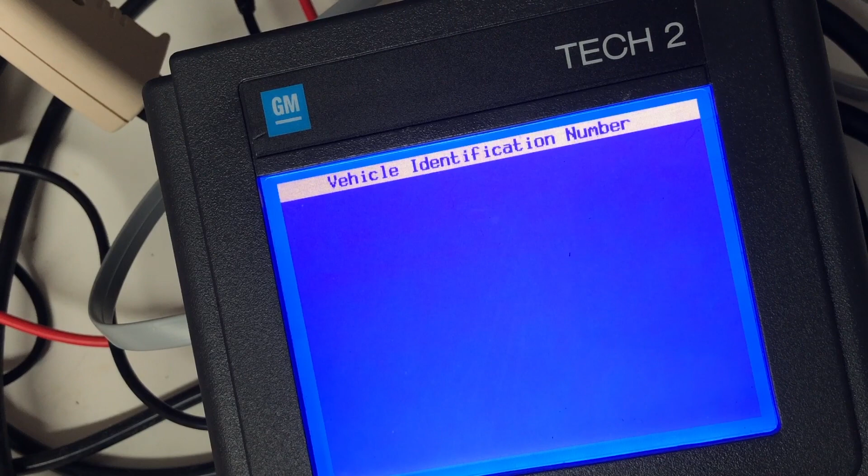And then if we go out of this and we go down to the VIN, there's our VIN. So our donor was a 16R7WJ 364-183. And if we go try to do some basic checks that the VCM is working okay, go in engine data display, and I think we actually find it in data 1 here for this year. Let's take a look at the ignition voltage area.

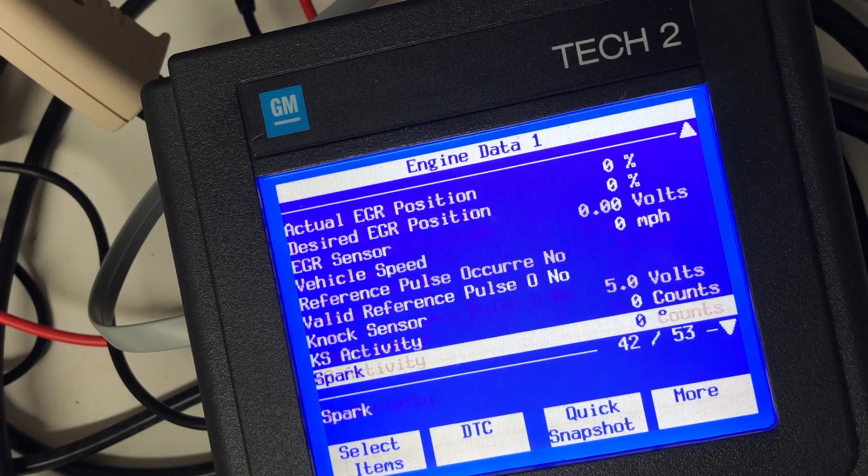Here we go. So here we can see there's an actual ignition 1 volts of 11.7. And if I come over here and hit the switch, it's going to go to 0. And I switch the ignition back on, and it's going to go back up to 12 from the bench power supply. Now I believe in data 2, we'll see that same kind of ignition high-low data as well.

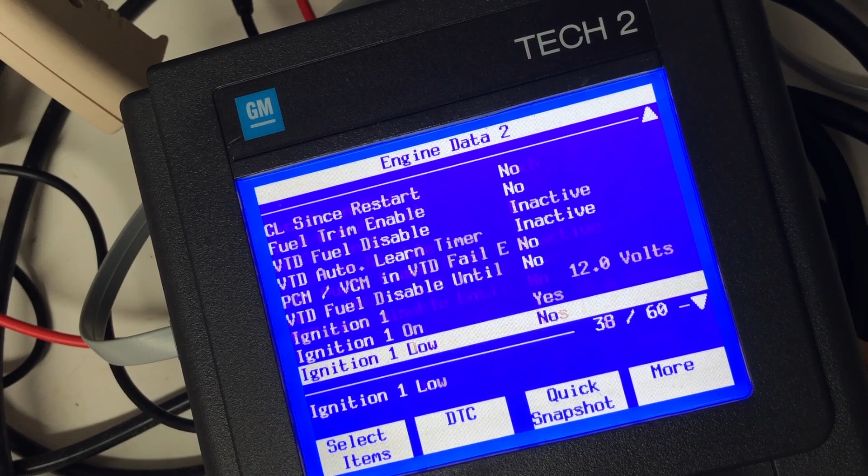So it's very interesting, you can see how the Tech2, even with very similar technology, each year things changed. Here we go, actually I should have went here in the first place because it's all combined up. So now we can have the voltage showing in the same screen as these other feedback indicators. So now if I flip that switch, I got 0 volts. I got no, yes, no. Turn it back on, I got 12 volts, I got yes, no, no. So it's definitely interacting, and we have communications to and from the scan tool and the vehicle control module.

So again, it passed our cosmetic checks, it's passing our electrical checks. Let's go ahead and give it a program.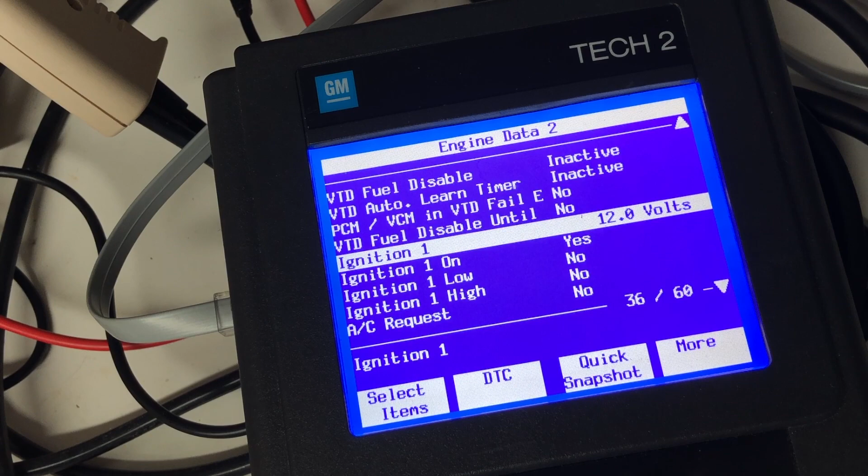So same setup, we're going to go over to the Tech2 and get it back to the start screen to prepare it for being used by SPS. You want to make sure you don't go back too far. If you go back too far on those back exit buttons, you can get the thing hung up sometimes. All right, let me see if I can get this without too much trouble over here to the screen.

All right, in position. So just like with the 96, we're going to go into the service programming system. We're going to select pass-through, replace and reprogram off-board programming adapter.

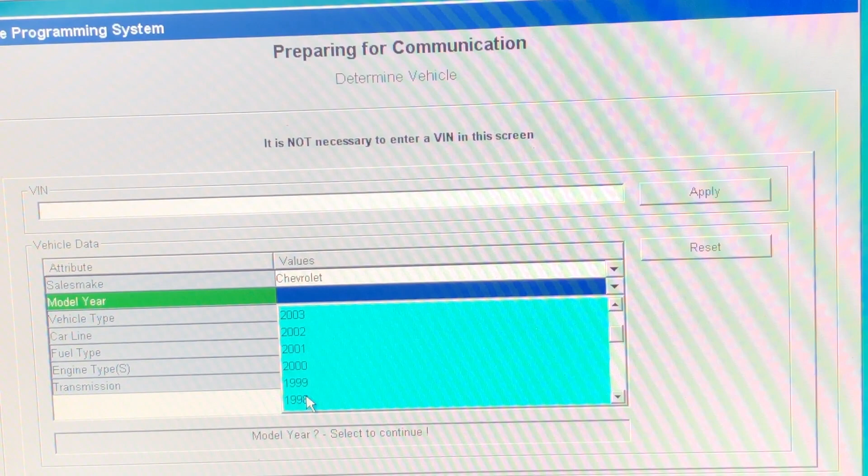We're going to build the vehicle. So it's a 98 light-duty truck, in this case it's a Suburban. It asks me what kind of fuel it takes, and I'm going to say gasoline. And actually, as before, I want to kind of lower this just a little bit so you guys can see it.

Build up the VIN and brand information in the bottom right of TIS2000 here as we proceed. So right now it's green, good communications, but it's incomplete data, it just knows what we entered here. So now we hit next, we'll get the screens about, do you have everything wired up correctly? Yes, we do. We would go through, if we were in the vehicle, swapping out the two controllers. We're doing this on the bench, so it's kind of all simulated.

Now we've got a red light while it tries to reach out and talk to the VCM. And unlike on the 96, this time we're actually able to retrieve that information as expected. So there's our VIN, there's our VIN from the V8 there.

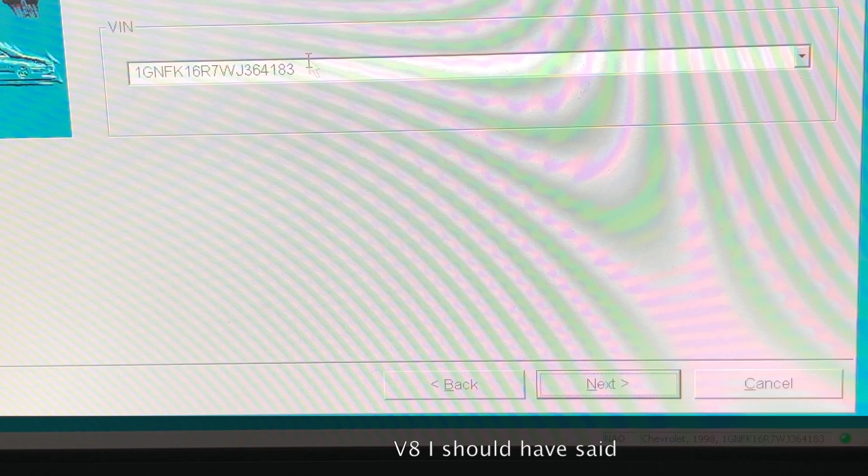And we're going to go plug in the target information that we want to go through and do here. So this vehicle's target destination, check my little list here, it's a little bit different. This guy that we want to put this into—sorry about that, guys, trying to find my place. There we go. I have a GMC Suburban this is going into, so it's going to be a 3G KEC.

KEC 16R 6W G5 10130.

Just checking our work here. 3G KEC 16R6 WG 510130 came out of a 1G NFK 16R7W J364 183. Right, so it came out of that and it's going into this. You see down here it says Chevrolet 98, and it's got that other VIN I just rattled off.

As soon as we go, hope you guys can read that. Maybe I can blow this up just a little bit. Nope, that's as far as she goes. Well, hopefully you can see that at the bottom.

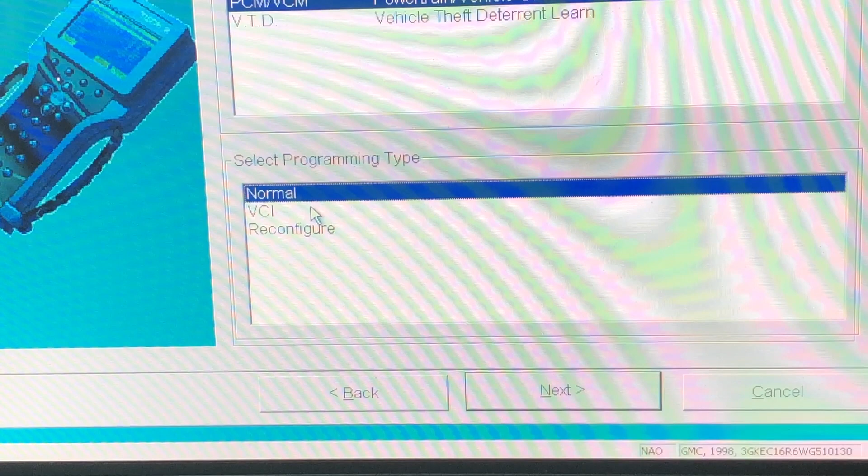VCI is something only used by the dealer. To do a VCI program, you have to have a code number that you get from the Technical Information System Service, like ACDelco TDS, and you're just not going to get something like that as an individual user. I don't even know if you would get something like that if you were a shop. It's a dealer thing for the most part.

All right, now we can read current calibrations. You notice, unlike the 96, we don't have the brake system anymore. Only the 96 had the electronic brake system built into the VCM.

So here we've got the operating system, and it's telling us, hey, you need to take 5095. There's nothing better than what you already have there. On the engine, you have 4761, but you need to take this newer one.

Now again, sometimes you'll see something like this, and it's not even in the list. The reason for that is this calibration was a Chevrolet, and we don't have that calibration available in the GMC we're going to. So even though it's a Suburban, and it's a 98, and it's a 5.7 liter VIN code R engine in both vehicles, there can be different calibrations between the brands.

And there could be other pieces of equipment that are different, in terms of if it had a different kind of transmission or something of that nature. Fuel system is the same. The system calibration, so we've got a 6223 in there now.

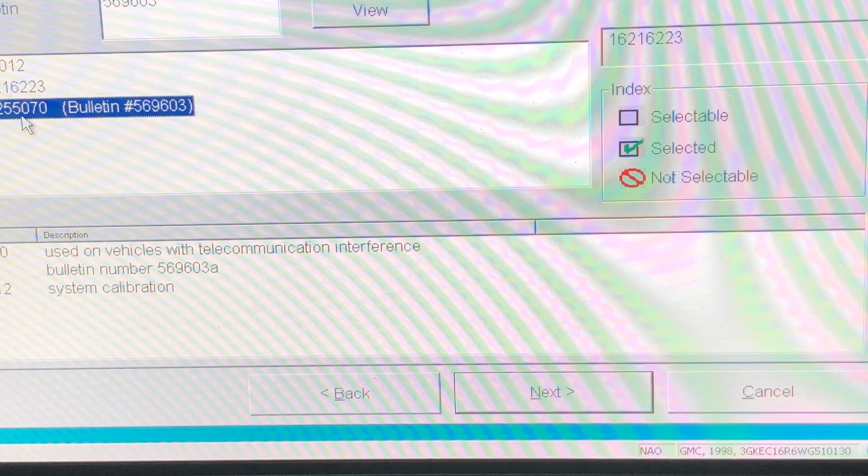We remember this from last time. This is the special update for a particular telecommunication interference problem. We don't want to take that, we don't have that situation. So we'll stay the same.

Speedometer, here we had an 0420. Our only choice with this GMC is 8997, so we will take it. And our transmission has no updates, it's the same for both brands.

And so here's just a summary: same, updating, same, updating, and updating. Hit next, and just like with the 96, it's going to go build what it needs to do. And it's going to start talking through the Tech2, just like we saw before, over to the VCM. In this case, we got a lot more data.

The 98 has 342,114 bytes, or 342K, that we have to send down to the flash. It's already started, it's dropping its estimate pretty quick. It started off at 12 minutes, now it's down to 7, now it's down to 4.

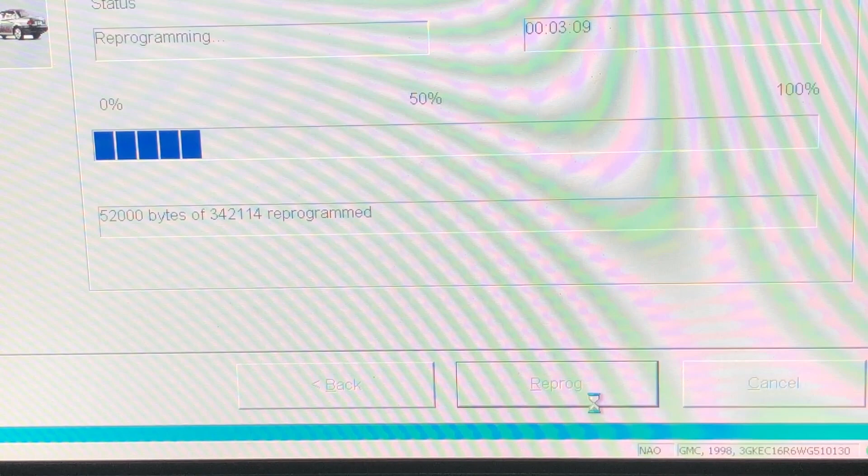Chugging away. The VCM is still 25-year-old plus technology, so is the Tech2, so is TIS2000. But the PC is much more newer and modern than what they were running in the dealerships in the day. So I imagine there's an extra bump in speed that we're getting because of that, and that's why it's chugging along a lot faster than it might have done back in the day.

All right, so we're down to, it claims it only needs 1 minute and 38 seconds, but I think that's still too high. We're almost up to half. I'm sure it's going to drop down to less than 1 minute here very quickly as it sees that things are chugging along very nicely.

And again, anytime you might see this, if it happens to sit for a while, you can always check the Tech2, make sure the Tech2 is not hung. It sometimes does, at least in newer vehicles, get to a point where it sits for a while in the progress bar, and I've just learned to be patient. TIS is pretty good, whether it be TIS2000 like this or even TIS2 Web, about putting an error message up if there's a problem.

So we're coming up in the last 30-something seconds here. Looks like we're coming up on 75% done. No errors at the programming so far. Chugging along, coming up on 80%.

Everything I'm showing here with a Tech2, you could also do with an MDI tool and a subscription at ACDelco TDS.com to the Tech2 Win Simulator, or emulator may be a better word for it. It runs on your laptop, uses the MDI as a pass-through, and communicates to VCM. The problem with that is you have to pay for a subscription over and over again for every VIN.

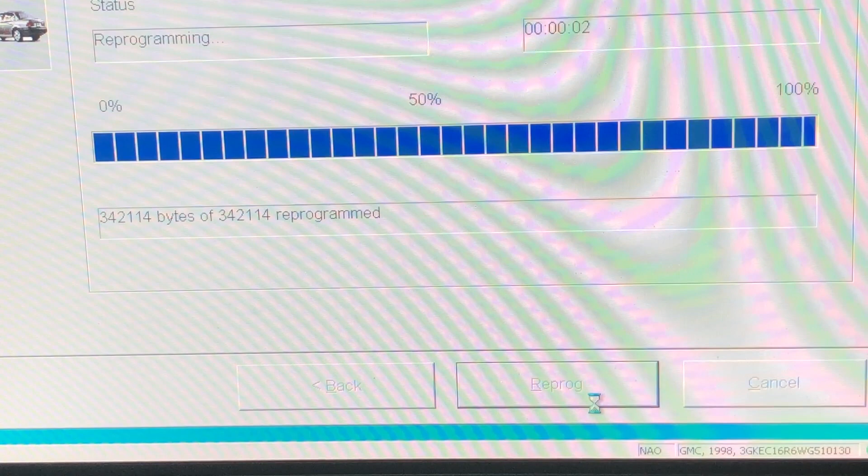I like the Tech2 on these 2008 and older vehicles because it's a one-time charge. You buy the tool and it's free to do what you need to do as long as you have a copy of this software that I'm showing.

Now that it was able to read everything in at the beginning, it comes back and says you are going to need to do this crankshaft position relearn procedure. Sometimes you don't have to do this. I don't personally do this unless I get the DTC, because sometimes you don't need to do it. And they do, in fairness, say may be needed - not will be needed, may be needed. So you don't always have to have that.

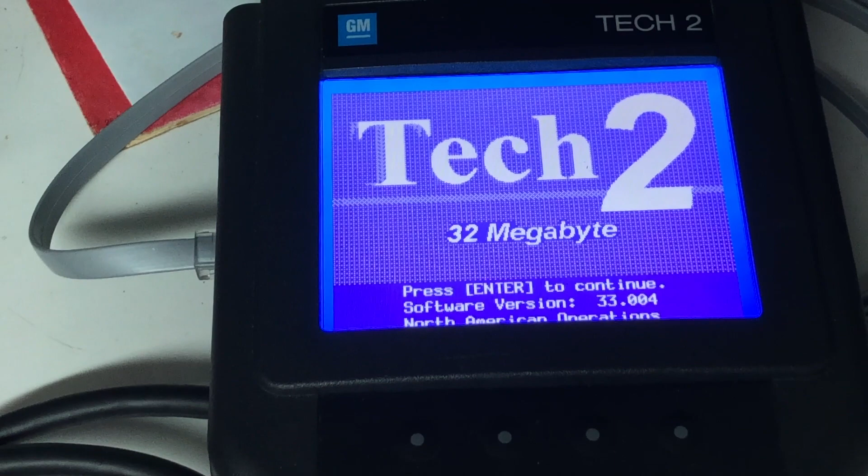All right, let's come over to Tech2 and let's check our work on this. So we're going to come over here and go back down where we were right there. Let me make sure the camera's picking this up so it's not too whited out. All right, let's rebuild the vehicle. Sorry about that, bumped the camera while trying to keep the Tech2 from bouncing on the table here.

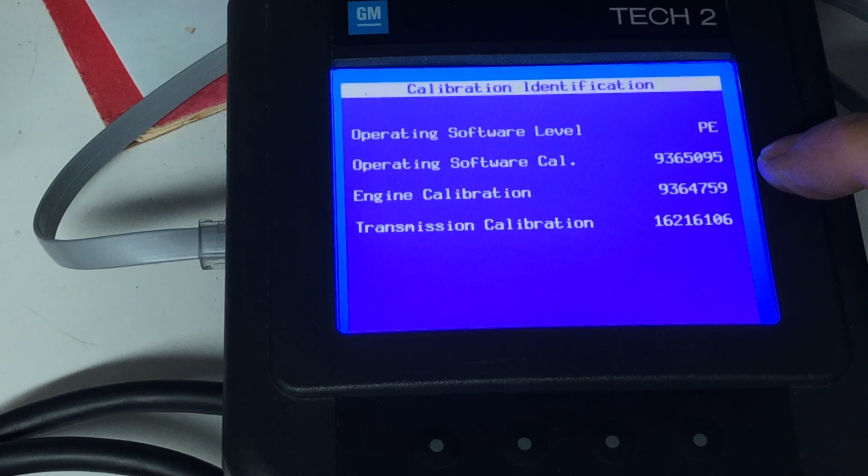98, light duty truck, powertrain information, VIN code R all the way in this pass. Started with a K, went into a C. 4-speed manual, half-ton, no air pump. Let's go down and ID the module. Take a look at our calibrations now: 5095 on the OS, 4759 on the engine, 6106 on the trans.

And our VIN is now 3GKE, blah, blah, blah, blah, blah, right? It went from our Chevrolet to our GMC.

Now, just like last time, although I forgot to do it and it actually caused an issue, it didn't this time, I'm going to turn this ignition key simulation switch in the off position because I want to make sure that takes. Even though it didn't glitch out like it did with the 96, it's just a best practice - leave that ignition key off. If you have it in the vehicle, leave it off for 30 seconds just to make sure that VIN takes. There's something about that - every now and then I've seen if you don't do that, you can sometimes have to redo what I just did.

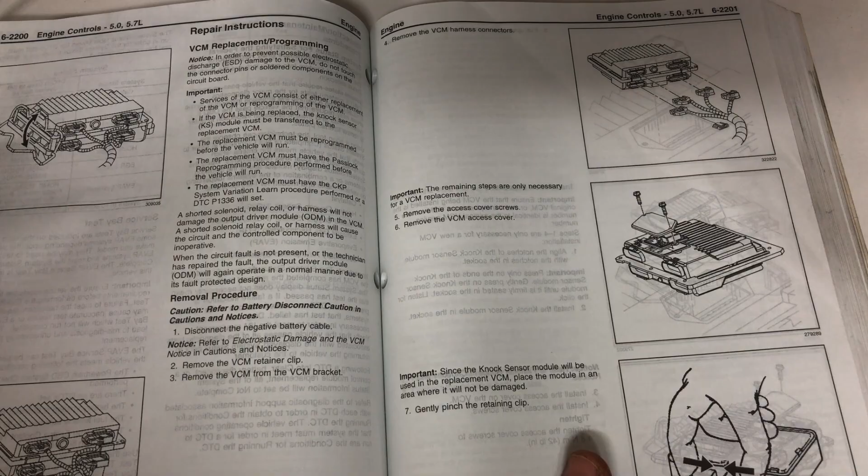All right, let's take a look at the final steps in the service manual as we wrap up. All right guys, last tour here through the service manual. So we talked about the information regarding the module that needed to be transferred, how to remove and reinstall that, reattach the cover, and get it reinstalled. What I mostly want to talk about here is in the back section, where they talk about the programming piece and what you need to pay attention to.

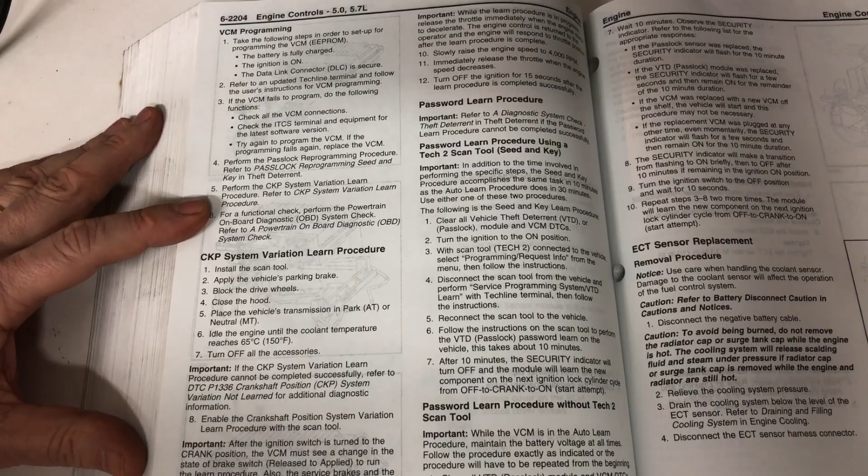I just wanted to double down one more time on this crankshaft position system variation relearn procedure - learn, relearn, I call it a relearn procedure. That's going to be documented here in the service manual, what you need to do with that. Let's see if we can give it a little bit more magnification here for you guys. So this is what you need to do for that, and you need to have the scan tool, of course.

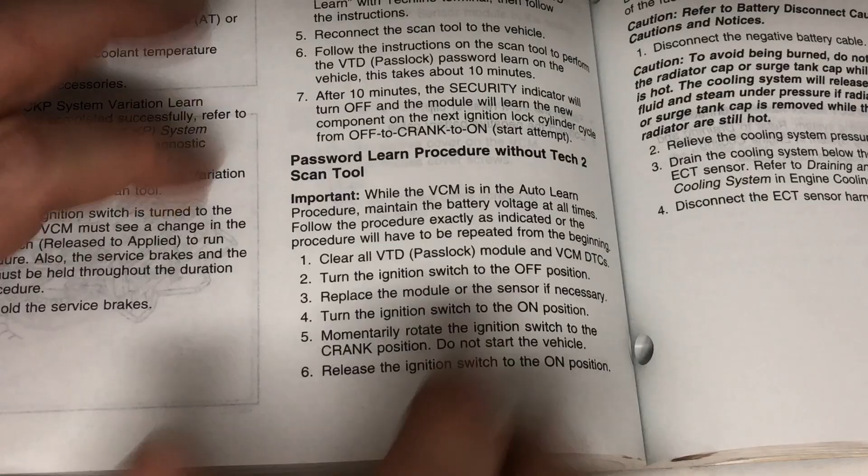And then similarly, here's how you do the password learn procedure. We obviously don't need to do this on the bench. If you have a Tech2, this one is documented on how you use the Tech2, but there's also a way to do this particular one without a Tech2 scan tool. They go over those steps here and here, so I just thought I would put that in here for you guys that have to do that.

So I hope you found this useful. I hope this helped you out, whether you've got a 96 or a 97 on that first generation, or a 98 up all the way through the old body style series into 2000, 2001 with the 3/4 ton, 1 ton trucks that continued on with these same Vortec vehicle control modules.